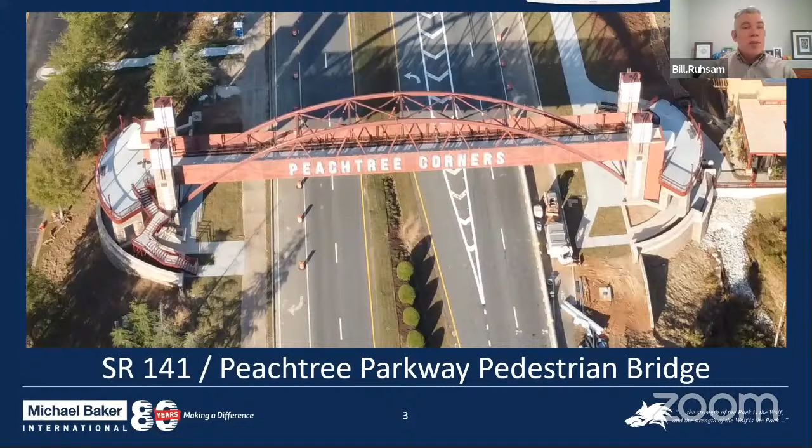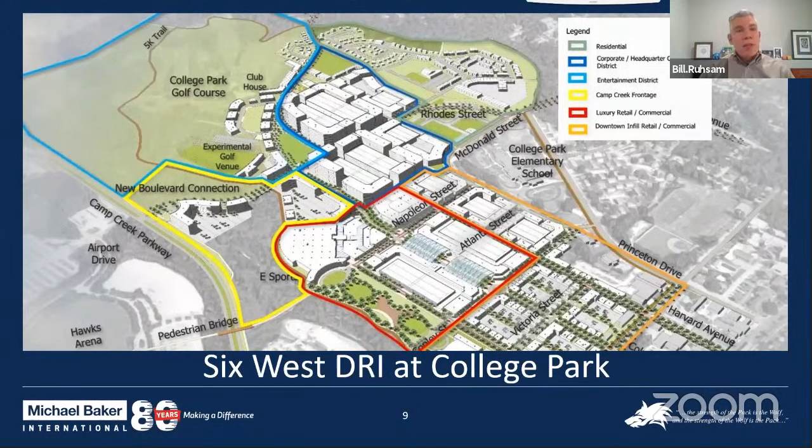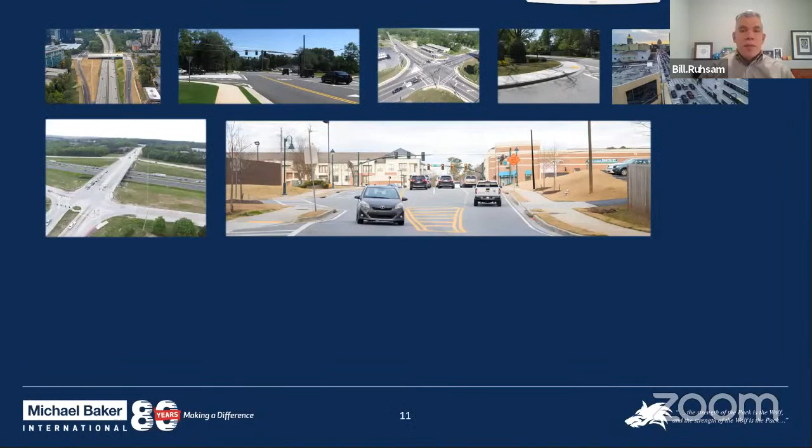This is the 6 West development, just west of downtown College Park, and immediately under the flight path for Hartsfield-Jackson. The area in question has been largely vacant since the 70s, when the city of Atlanta and the FAA acquired the majority of properties in the area due to the impacts of the airport. Now the city envisions a redevelopment similar to Avalon and others in the region, and we help them take the first steps. And of course, that was just a small sample of everything we worked on in the recent years, which comprises a whole bunch of stuff.

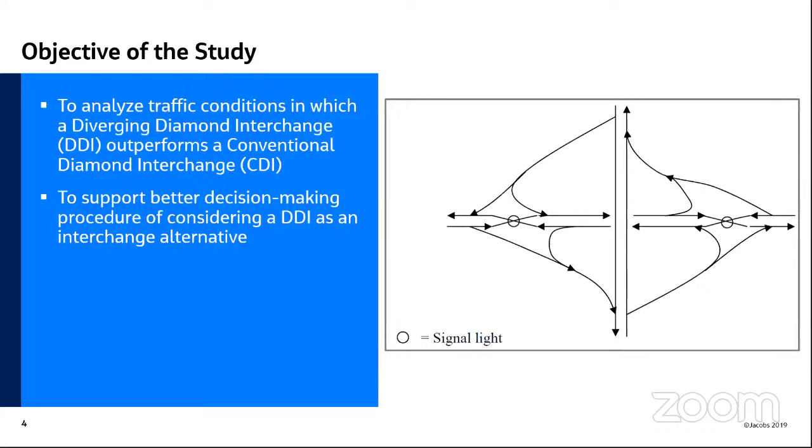For the study, the methodology was processed in a two-step procedure. The first step was the critical lane volume, or CLV analysis, which calculates the capacity and demand of critical movements and calculates the V/C ratio of an interchange as the comparison parameter.

The advantage of this method is that it allows the evaluation of a large number of samples relatively quickly and with reasonable reliability. So it was able to perform the evaluation of a large number of traffic scenarios, but it also has a downside, which is that the only parameter it can measure is the V/C ratio, so it cannot provide the complete operational picture. That's when the second methodology comes in, which is the microscopic simulation study using VISSIM.

Unlike CLV analysis, VISSIM analysis is capable of collecting numerous operational parameters, including average delay per vehicle and throughput, which allows us to show a more complete operational picture and confirm the results from CLV analysis. But unlike CLV analysis, the simulation study tends to be more time consuming. So we selected specific traffic scenarios to confirm the results from CLV analysis.

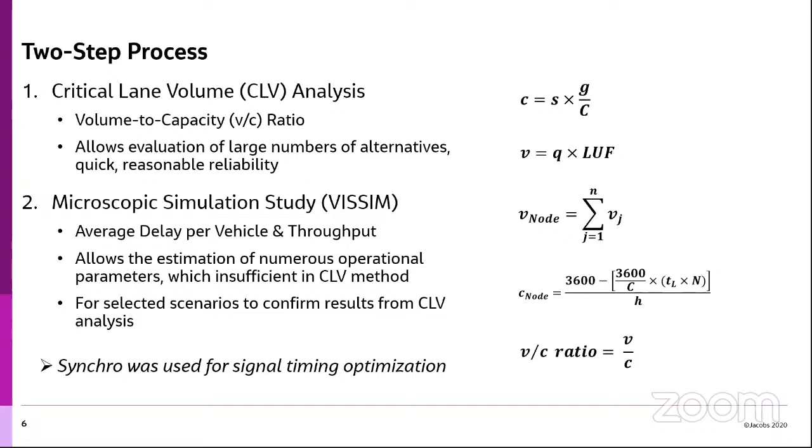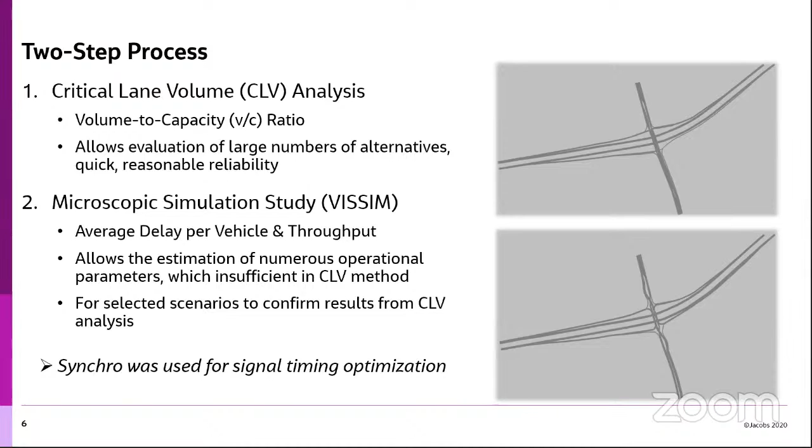For both methodologies, three lane configurations were tested to see the effect of different numbers of lanes on the cross street on the operation of each interchange design. The first lane configuration was derived from the real-life example of before and after interchange configurations at Jimmy Carter Boulevard, located in Gwinnett County. The second configuration is a 6-lane bridge segment with 2 throughs and a left turn lane on each approach. The last lane configuration tested had the most lanes on the cross street, with an 8-lane bridge of 2 throughs and 2 left turn lanes.

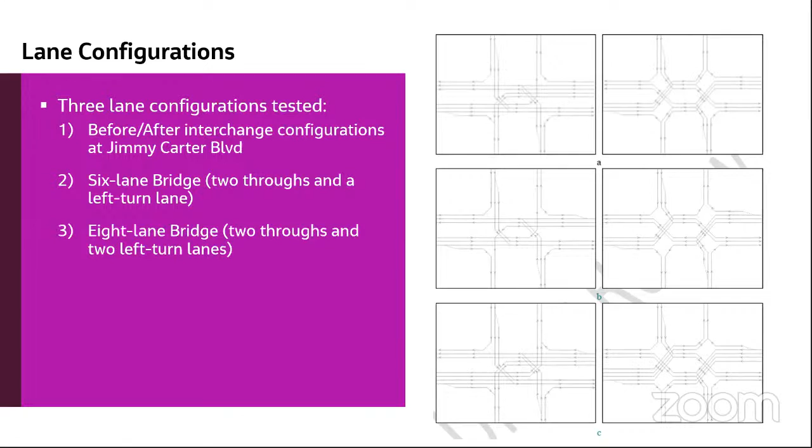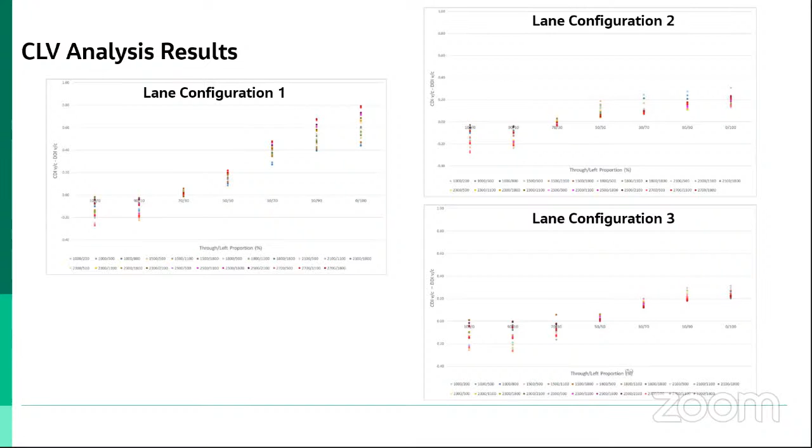From this data, we figured out that the CDI tends to perform better than DDI when the left turn proportion is less than 30% in lane configurations 1 and 2, while in lane configuration 3, with the most lanes, this breakpoint was around the through-left proportion of 50-50. This also means that the capacity of CDI is more sensitive to the number of lanes than that of DDI.

We also found that the advantage of DDI is amplified at higher demands, which are presented in darker colored data points in the charts. As you see, in the positive zone, those darker colored data points have a bigger difference in V/C ratio between the two, which means that the DDI performs a lot better than CDI. And in the negative zone they are closer to 0, which means that the advantage of CDI has degraded at higher demands.

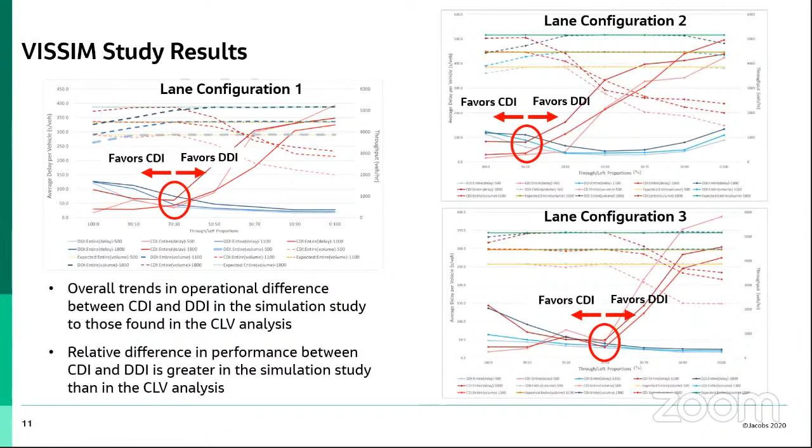So from this study, we figured out specific traffic conditions in which either CDI or DDI performs better than the other. And CDI tends to be favored over DDI at left turn proportion less than 30 to 50%, and its advantage tends to be higher when the cross street volume is lower. On the other hand, DDI tends to perform better at medium to high traffic volumes on the cross street, with left turn proportion exceeding 50%.

And we also found out that the capacity of CDI is more sensitive to the different lane configurations, meaning that with more lanes on the cross street, CDI manages to operate at a similar level to DDI at higher left turn proportion.

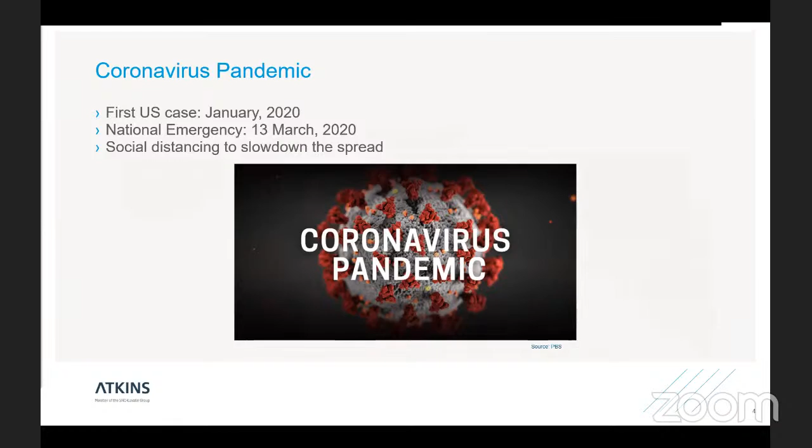Moving to the topic, we are going through a pandemic, the coronavirus pandemic. The first US case was identified in January of this year. A national emergency was declared on March 13, and we are practicing social distancing to slow down the spread. Social distancing is causing less traffic and new traffic patterns. The pandemic has changed our lives.

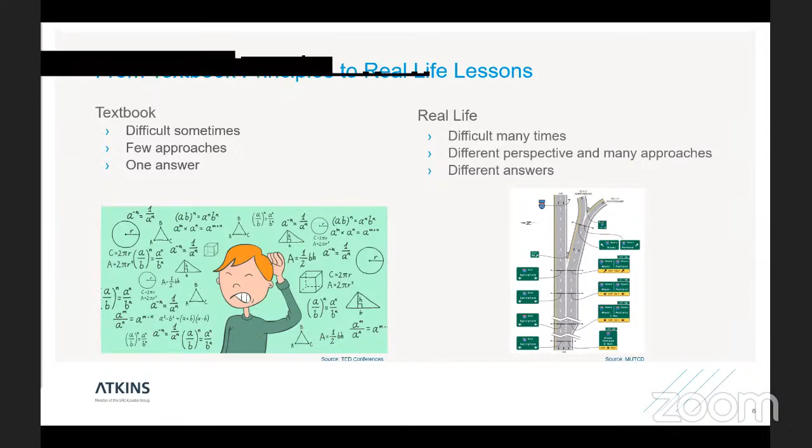However, life goes on. While in college, textbook problems were difficult sometimes; real life problems are difficult many times. Textbook problems may have had a few approaches, however, they had only one answer. In real life, we have many perspectives, approaches can be different, and answers can vary as well.

I'll share my experience in traffic forecasting during the pandemic. Everyone has a different perspective and there will be different approaches. I will share my struggle for the direction, adaptation, things learned, and I'll end with some interesting findings during the process.

Struggle for direction. Traffic forecasting is always about predicting future traffic conditions. Now, we are forecasting during the pandemic for a future when there is no pandemic, hopefully there is no pandemic at that time. What is the post-pandemic future? Will it be different, and how? We do not know the answer. We can just predict the future with some assumptions.

Current traffic patterns are different, but still we need to plan for the projects. Traffic counts during the pandemic need careful review and adjustment. We must adapt with our professional judgment, which is not only science, but also an art. We utilized GDOT's Traffic Analysis and Data Application (TADA) counts for the pre-COVID-19 condition, collected tube counts during COVID-19 at the locations where TADA counts are available within the project area, and collected turning movement counts as needed for the project.

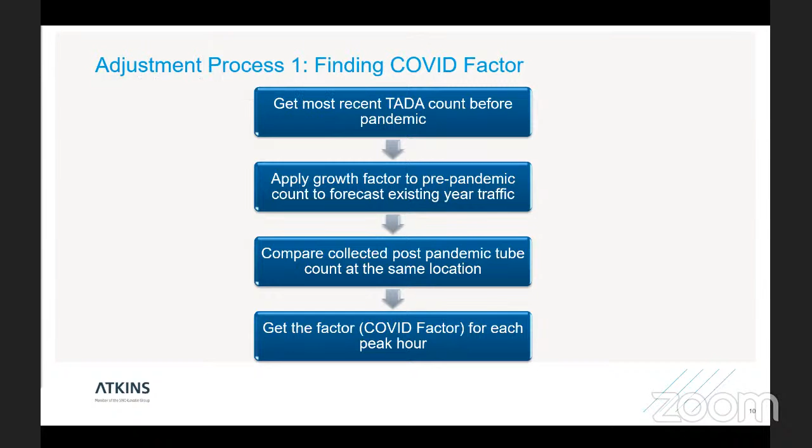Finding the COVID factor is the first adjustment process, and we can see the process in the flowchart. Get the most recent TADA count before the pandemic, apply a growth factor to the pre-pandemic count to forecast existing year traffic, compare it with the collected post-pandemic tube count at that same location, and get the factor, which I'm calling the COVID factor, for each peak hour.

Process 2, the second adjustment process, is adjusting the TMC by the COVID factor. We would identify the TADA historic peak hours, then identify the TADA peak hours in the existing year TMC, apply the peak hour COVID factors, and thus we can get the adjusted TMC.

Things learned during the process: a review of GDOT historic count locations prior to pandemic traffic count collection is very critical. The existing peak hour may vary and it may have shifted. Two COVID factors for two peak hours. The peak hour should be selected based on the historic count instead of the existing traffic count.

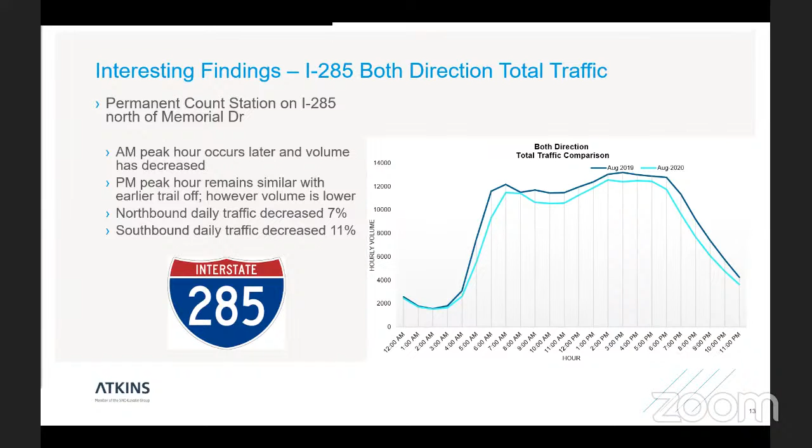From the graph, we can see the AM peak hour occurs later in the day and the volume decreased during the pandemic. And the PM peak hour remains similar, with an earlier trail-off and a lower volume. Not in the graph, however, we have seen a 7% decrease in northbound and an 11% decrease in southbound daily traffic during the pandemic.

During the analysis, I also analyzed the traffic based on vehicle class. We have seen something very interesting for truck traffic, especially for heavy trucks. The total heavy truck traffic increased by 2%, with a noticeable increase during the peak hours. In the AM, heavy truck traffic increased 10%, and in the PM, it increased by 8%. That's a lot. We think what's going on here is the trucks that used to avoid I-285 during peak hours came back to I-285 as it became a more efficient route during the pandemic.

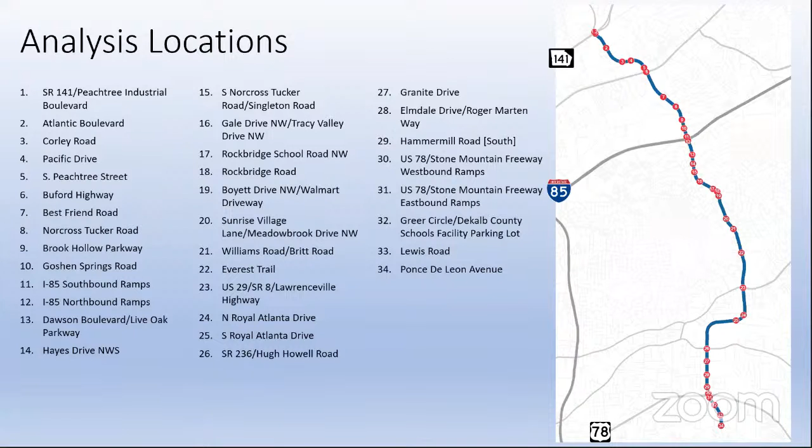I'm going to go a little bit into this project I did, a corridor study on Jimmy Carter Boulevard and Mountain Industrial Boulevard. Y'all are probably familiar with this corridor if you're from the Atlanta area. It's a congested corridor, even in the existing conditions. We analyzed 34 locations as a part of this study, from Peachtree Industrial Boulevard all the way down to Ponce de Leon Avenue, using Synchro software.

In order to forecast existing 2019 volumes to 2050 volumes, we looked at historical growth data, travel demand model data, and growth rates used in previous studies. I'm not going to bog you down too much with this, but we ended up with a 1 to 1.25% growth rate for various locations along the corridor in order to develop our future volumes.

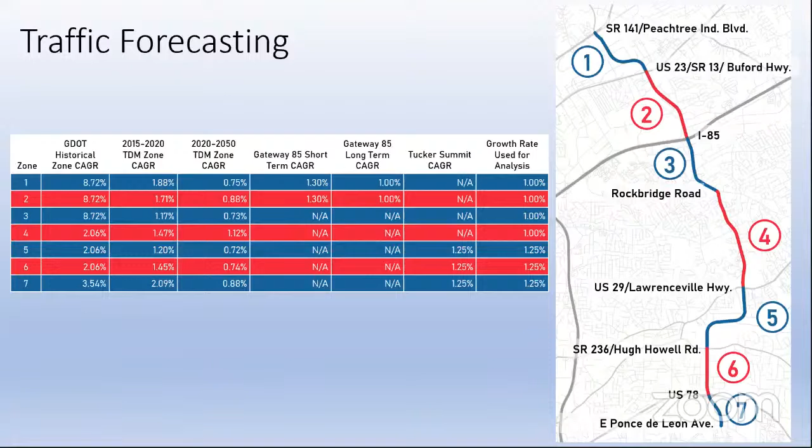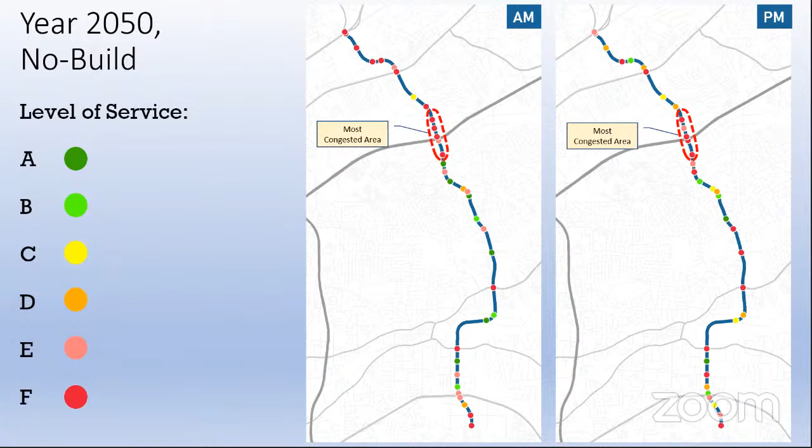So as you can see here, I've mapped out what the Synchro results were for level of service for our forecasted 2050 conditions. There's general congestion throughout the corridor, but especially the area around the I-85 interchange was the most congested. And that's what I'm gonna explain in more detail for this presentation, because I could probably talk for 2 hours about this entire corridor.

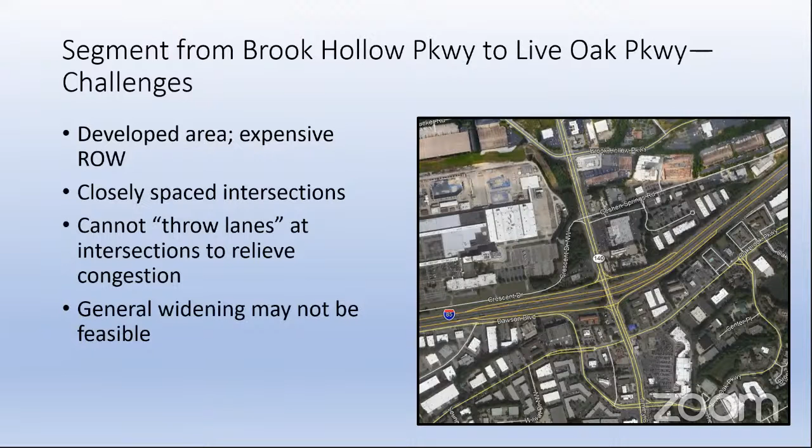So this area has some unique challenges. The area is very developed. That makes right-of-way purchasing very expensive, and the intersections are closely spaced, which means that it's not really a solution to just add lanes to meet the demand, because your ultimate goal in a corridor study, a traffic engineering project, is to propose something that can actually be built, not just get something to work in Synchro. So we had to try and find solutions that were feasible for this area, and didn't necessitate general widening or an obscene amount of turning lanes.

So what solutions did we arrive at? Well, for the segment from Brook Hollow Parkway to Goshen Springs Road, we decided first and foremost that an R-cut was probably the right alternative for the Goshen Springs Road intersection. That intersection is very close to the I-85 interchange. It interacts with that interchange, creating general congestion both at that intersection and at the interchange. And the traffic using that roadway has connectivity with Brook Hollow Parkway further to the north. So you're not really losing a lot of connectivity by restricting that intersection. And it helps with the general operations, helps that intersection perform better, helps the interchange perform better.

Now, in order to accommodate that diverted traffic as well as traffic growth and general expected future volumes, at Brook Hollow Parkway, we recommended a quadrant intersection in the Northwest Corridor using the existing Financial Drive roadway. Now, this allows us to divert the heavy southbound left movement from that intersection, and therefore provide a lot more green time for the other movements, allowing it to accommodate the expected traffic volumes at an acceptable level of service.

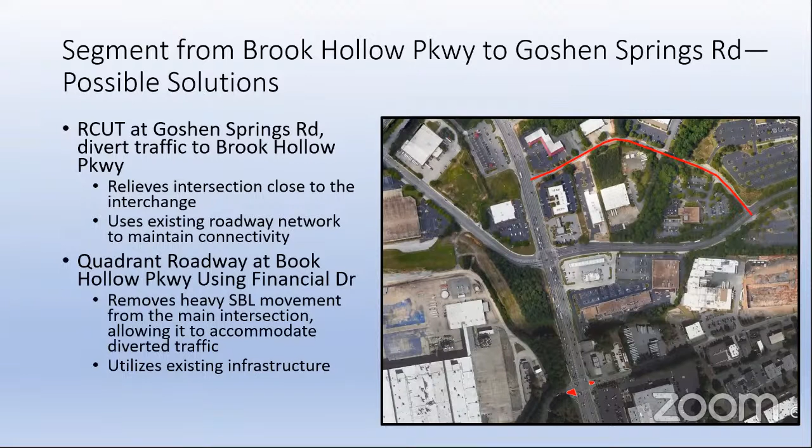A positive thing about this alternative is it utilizes the existing infrastructure of the area, so it doesn't require expensive right-of-way purchases or construction other than a couple of signals and maybe some additional turn lanes if those are determined to be needed in the future. But it makes the best of what is already out there and is one of the more feasible alternatives for this location that we analyzed.

The next section of this sub-corridor, as I'll call it, is the Jimmy Carter at I-85 interchange. Now, we are not going to sit here and tell you that we discovered the solution to this interchange in this corridor study. This location will require a more in-depth, full interchange study to come to a conclusion. But we did analyze some alternatives that show that they may be promising.

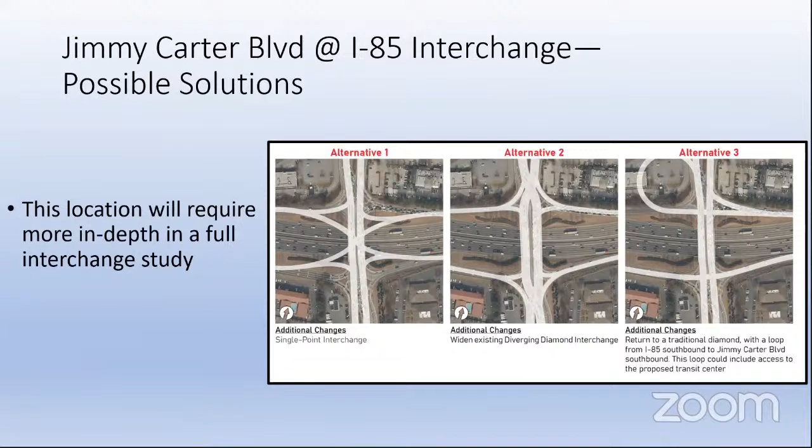We analyzed a single point urban interchange, which generally works pretty well when there's large through and left turning volumes at interchanges. We analyzed widening the existing diverging diamond interchange, which also reached an acceptable level of service, and a return to a traditional diamond interchange with a loop ramp, which also worked well. But we were performing the analysis using Synchro. It really probably needs to be performed using micro simulation, and we feel good about these alternatives, but there's definitely more work to be done at this location.

Moving along, the segment from Oakbrook Parkway to Live Oak Parkway. This is a very interesting location. A lot of challenges. It's extremely developed, very high traffic volumes, even in existing conditions similar to the interchange. There's a lot of congestion at this location. And so what do you do? Well, we came up with the idea to build a grade separated movement, reconnect Oakbrook Parkway and McDonough Drive, which were disconnected as a part of the DDI project, and allow through movements only at this location. And then also prohibit through movements from Live Oak Parkway.

And this helps Live Oak Parkway operate a lot better. Obviously, there will be no congestion at the overpass or underpass. It's just a through movement only, no turning movements, no traffic conflicts. And it, again, allows you to utilize existing infrastructure. You can use the existing roadway facility of Oakbrook and McDonough Drive to the north to provide this traffic relief, and you can use the existing pavement that is currently accommodating through traffic at Live Oak Parkway and Dawson Boulevard to add additional turn lanes without having to expand massively and buy a lot of right-of-way and build a lot of construction.

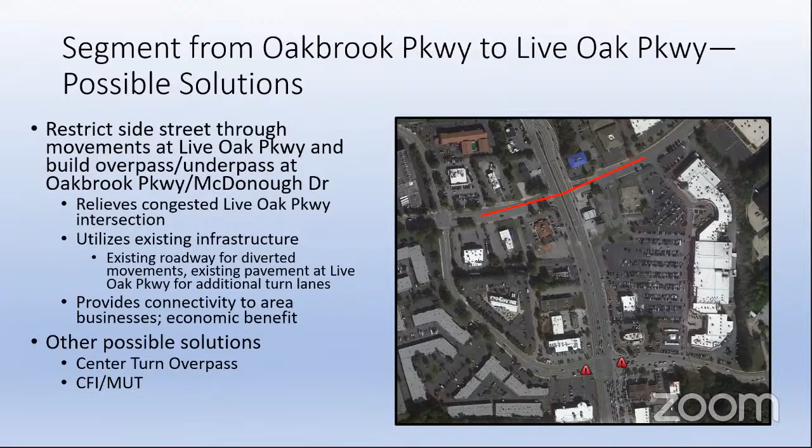However, because of the close proximity to the interchange, the highly developed area and expensive right-of-way, we determined that the overpass, underpass, and restricted through movements was probably the best solution.

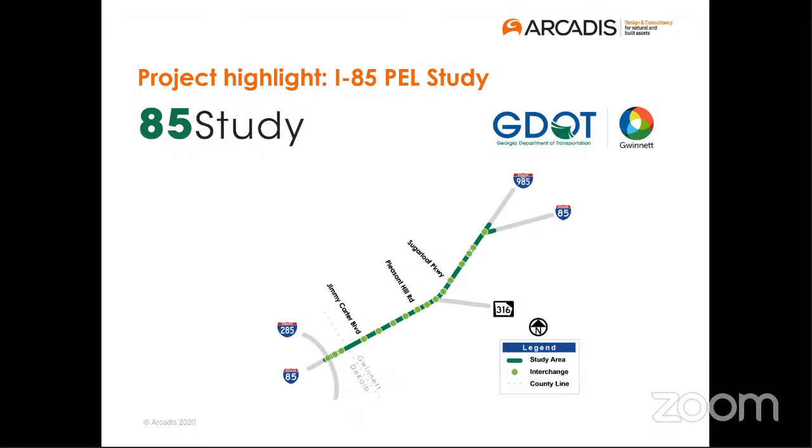So this study is basically just trying to make improvements. It's a long-range study. I've been working on this for more than the past year. Unfortunately, I don't have results or as many answers as Patrick had to share, but I do want to talk a little bit about what we've done so far and my experience working on it.

So the first thing that we dove into was to look at the existing conditions as well as projected future conditions of the corridor and to identify the needs of the corridor before being able to do anything else. So we did volume development for this. We did traffic modeling. We used a tool called FreeVal. For those of you familiar with the Highway Capacity Manual's freeway facilities methodology, it's basically what FreeVal uses, very similar to HCS freeway facility methodology.

So we built our FreeVal model of the whole 18-mile corridor and calibrated that to the existing speed data that we had from RITIS. And after calibrating that model, used the growth rates that we had developed for 2030 and 2050 no-build years to look at the no-build conditions on the corridor.

And then to identify these existing and future conditions and the needs assessment, we folded those traffic results into all the other disciplines that we looked at: crash analysis, roadway deficiencies. We did a human factor analysis, looked at demographics and land use, and did environmental screening. And it was cool to step out of the models and the numbers and start looking big picture at what these models are telling us, how it fits into these other disciplines, to work closely with roadway designers, planners, even our environmental team, and look at things comprehensively.

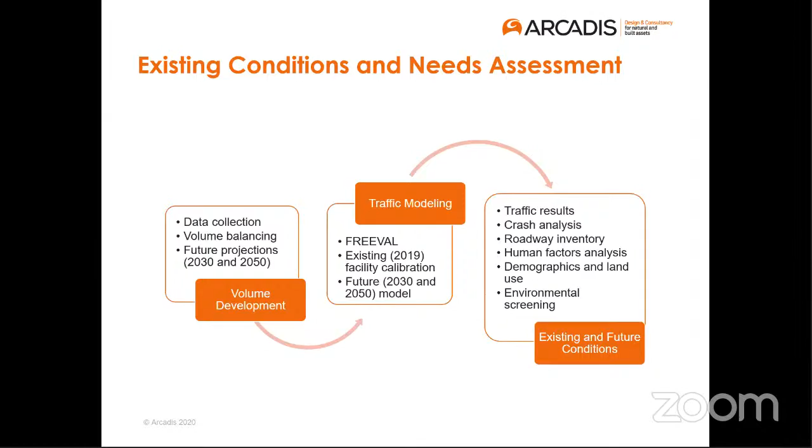I did want to share a little bit of results. So these speed heat maps here are basically the speed, the congestion on the corridor.

So on the left, we've got our southbound heat maps, basically starting from the top and driving southbound through the corridor. So this here on the left is the heat map from that RITIS speed data that we gathered. And then on the right side is from our calibrated FREEVAL model. So you can see here in the southbound direction, it's really where demand from State Route 316 merges in with 85 southbound that we really see a bottleneck here that's basically affecting the southbound morning operations.

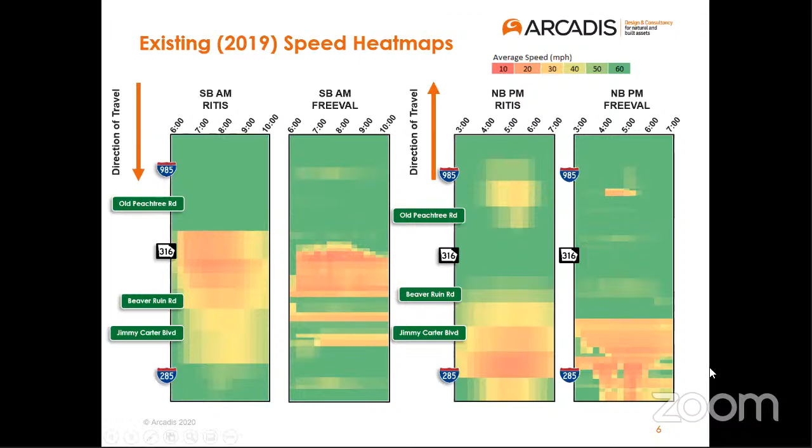And these heat maps here on the right are for the northbound direction. Again, the RITIS speed data, and then our calibrated FREEVAL model, with the primary bottleneck in the northbound direction being between Spaghetti Junction and basically the Jimmy Carter interchange, or a little bit up to the Indian Trail interchange, which is to be expected.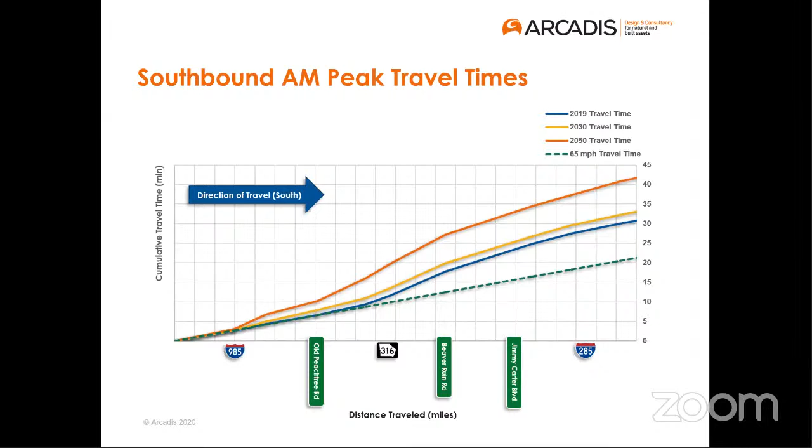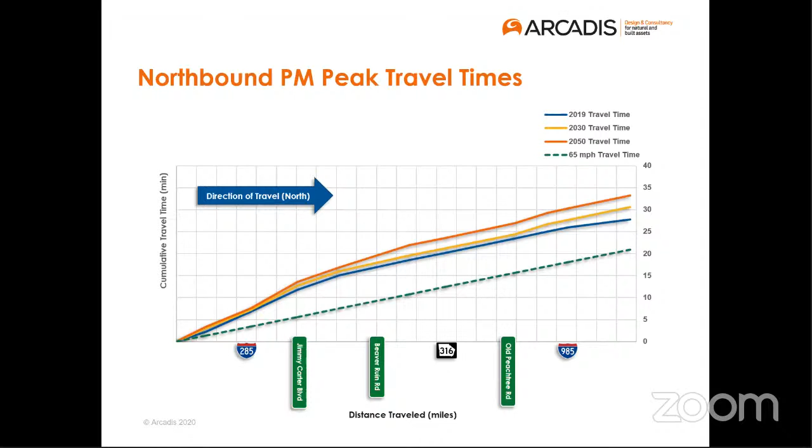For the northbound, similar, we see 28 minutes to travel the entire corridor in 2019 compared to, again, a 22-minute free flow travel time. And we see that growing up to about 34 minutes by 2050. So similar to what we were seeing in the heat maps, not as pronounced of a change into the future years for the northbound, just because of the bottleneck there at 285.

So I won't get into all of the needs assessment that we did, but we basically pulled together all of these different results with the different disciplines and actually tried to hammer down to the root causes of what's happening on the corridor and what needs to be changed to see improvements. And then we moved into alternative development.

So we put a lot of time and effort into thinking of every possible thing we could do to improve I-85. We came out with 1,200 different ideas, which is a lot, and put a lot of thought into distilling those 1,200 ideas into 204 distinct alternatives to go into our three-tier screening process. So the screening process is basically 3 tiers, where at each tier we take a smaller list of better defined, better developed alternatives and give them a more robust analysis.

So we're currently in that tier 1 screening, that highest level of screening and analysis. And of those 204 alternatives, which I can't really go through quite yet, I do want to share that we have these broken out into 6 categories.

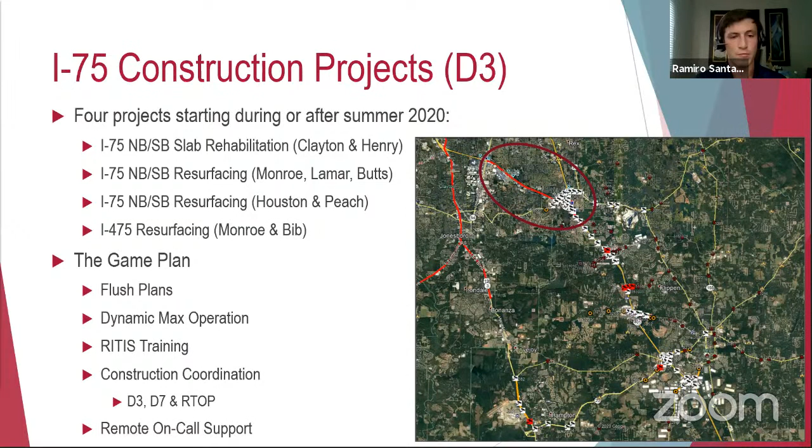And as you can see on the right, this is one of the projects that we are helping with, which is the first one that's listed, the I-75 slab rehabilitation project in Henry and Clayton County. As you can see in that oval on the image is the construction limit, but we've also included some images of the CCTV locations, other construction projects that have been going on, and what traffic signals are in the area, so that way our remote on-call support staff can really easily identify any areas that they need to look at.

And we continue to get any updates from the districts or our RTOP managers to know if there's any other areas that we need to specifically look at. So that basically concludes my project.